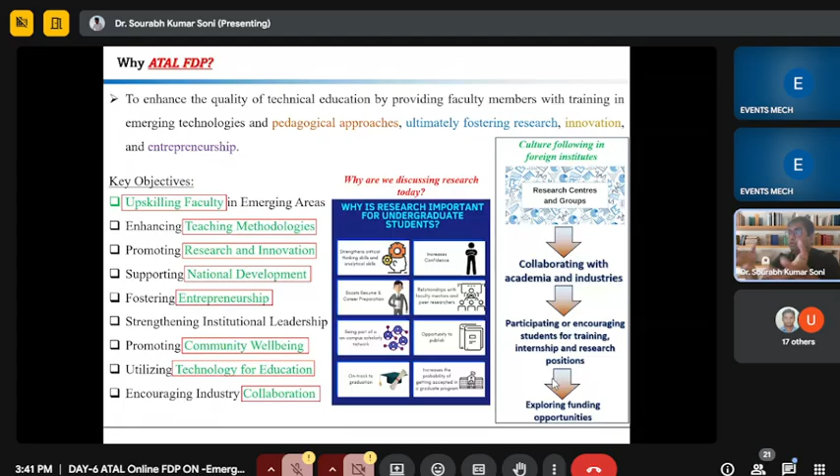For that, I observed that in foreign countries, professors are forming research groups and centers, and in those centers so many BTech students, master students, and PhD students are working. Further, they are collaborating with academia and industry regarding their research work, and professors are also encouraging students for training, internships, and research positions. Further, as a cumulative approach, they are exploring funding opportunities for their research. These are the trends usually going on in foreign countries. So as an Indian postdoctoral associate, I also want to explore this area for our faculty members.

So now comes the topic. Today we are talking about composites, additive manufacturing, high entropy alloy, and material characterization. The first topic is composites.

If anyone asks what is a composite, the first thing that comes to mind is, what is the difference between an alloy and a composite? From this slide you can see this is the alloy - in an alloy, basically atomic level mixing is there. But in composites, if you use two or more distinct phases like metal, ceramic, or polymer, they remain separated at the microscopic scale, but they will do their work together while remaining present in their base material.

So this is the main difference between alloy and composites. And if we want to classify the composites available in the materials arena, there are basically two kinds of composite. First is based on the matrix, and second is based on reinforcing material.

Based on the matrix, the popular ones are metal matrix composites, polymer matrix composite, and ceramic matrix composite. And if we look for application specifically, structural composite and particulate composite are more popular among the other composites. If we hear the word composite in some presentation, what is our perception? It is more useful than conventional material, maybe more lightweight and more strength.

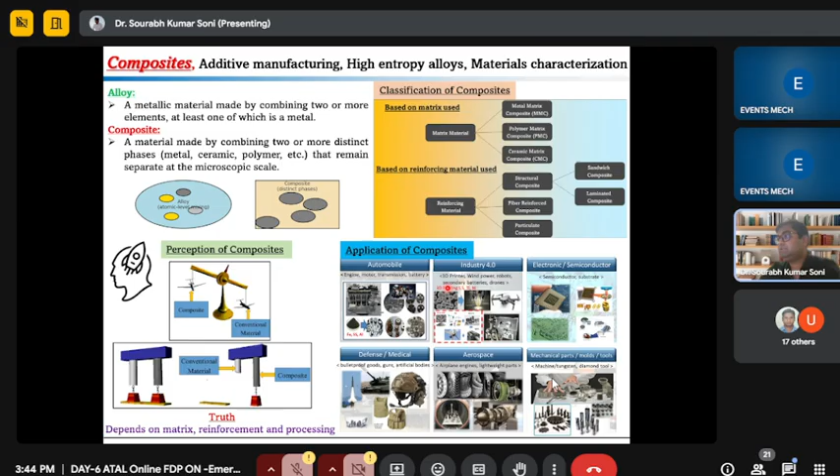So there is a huge demand for composites in the material science industry, and we are using them, and this field is under evolution also. In future 10 or 20 years, definitely composites will replace conventional materials.

So from this slide, I would like to highlight which kind of matrix materials are available in the composite arena. If you follow metals, so aluminum, copper, magnesium, titanium - this kind of matrix material. If you go for polymer, then epoxy is the most popular and widely used. If you go for thermoplastic polymers, then these are some matrix materials available.

If you are looking for fiber, then glass fiber and carbon fiber are in the forefront, followed by aramid and boron fiber which are also very popular. And in research kind of activity, we are following jute fiber, bamboo fiber, and cotton fiber for producing composites.

What about the reinforcement material? Huge variety of reinforcement material. What kind of property you want to increase in the basic matrix material - so based on that, we can use the reinforcement material.

There are two kinds of reinforcement material: micro size and nano size. Micro size means their size is in the range of micro, and nano means nano size. So they are usually categorized, and further categorized into carbon nanomaterial, some ceramic nanomaterial, ceramic carbon nanomaterial. So there is a huge variety.

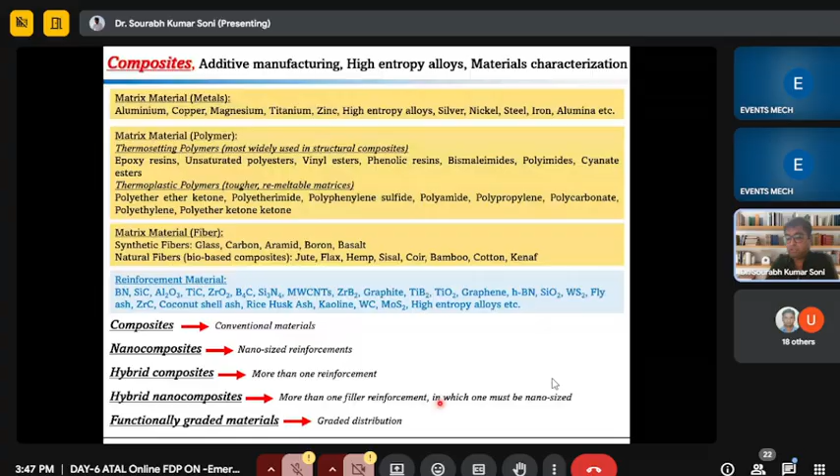So you can read - in previous sessions by our speakers, I observed that they introduced composites, so I skipped that composite part. So now I am talking about metal matrix hybrid composite, composite and nanocomposites.

So as you can see from this diagram, there is a huge number of publications going on since 2010 to 2024.

2025 is going on, so still there are some less. Definitely it will cross 24 in the next 4-5 months. So there's huge publication activity in hybrid composite and nano composites.

For fabrication of this composite, some fabrication processing routes are used, and among them stir casting is widely used. Stir casting is the liquid processing route, and powder metallurgy is the solid processing route. So in liquid processing, stir casting is widely used, and in solid state, powder metallurgy is widely used. Apart from these two techniques, spark plasma sintering, SPS, is also popular to produce specimens, and this comes under the solid processing route. So these three are the major contributors.

Apart from these three, liquid and solid, additive manufacturing is also now trending. In additive manufacturing, I personally observed that DED, especially DED and SLM, are used by researchers to fabricate hybrid nanocomposites.

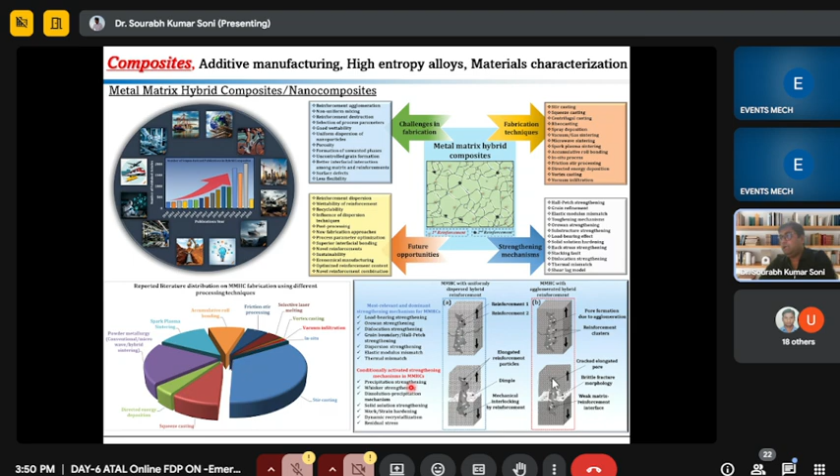Before going to the processing condition, I want to highlight that dispersion of reinforcement is very important, very critically important. So for achieving uniform dispersion, various kinds of dispersion techniques are available in the material science field.

The first one is ultrasonication. In ultrasonication, what we do is pour our reinforcement material into the solvent, then perform ultrasonication, and then dry the powder to get the reinforcement in powder form. This is the ultrasonication apparatus, where we try to break the agglomeration within the solvent material. This is very popular specifically for nanoparticles.

This is mechanical stirring, same as ultrasonication, but instead of using an ultrasonication apparatus, we use mechanical stirring so that we can uniformly mix the two reinforcement particles.

Another technique is ball milling. This is the setup - you can see in ball milling, this is the jar. In this jar, there are some balls, and with the balls we pour our reinforcement or matrix metal, whatever it is. I will clarify this further later. Then we ball mill this powder with the help of these balls, and we get some uniform dispersion, but it has some implications too, which we will discuss later.

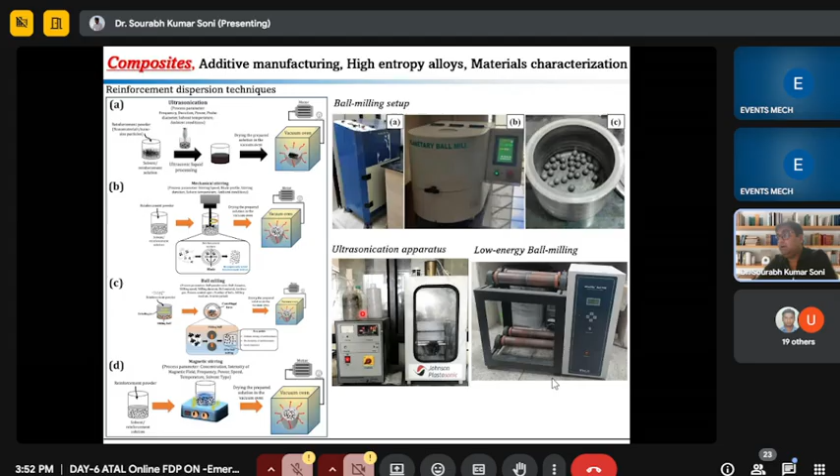If you follow the composites research publications, you will find this easily.

For the fabrication route, earlier I mentioned that the liquid state is very popular, and in liquid state, stir casting is more popular. This is the schematic of stir casting, this is the schematic of squeeze casting, and this is the schematic of ultrasonic assisted stir and squeeze casting.

In stir casting, we cast the molten metal under gravity, without using any secondary forces. But in squeeze casting, we cast the molten metal with the help of a hydraulic ram to achieve a more dense specimen. So this is squeeze casting.

In ultrasonic assisted squeeze casting, we take the help of an ultrasonication transducer to get uniform dispersion of reinforcement particles within the molten metal during casting. So these are the three very familiar casting techniques we use.

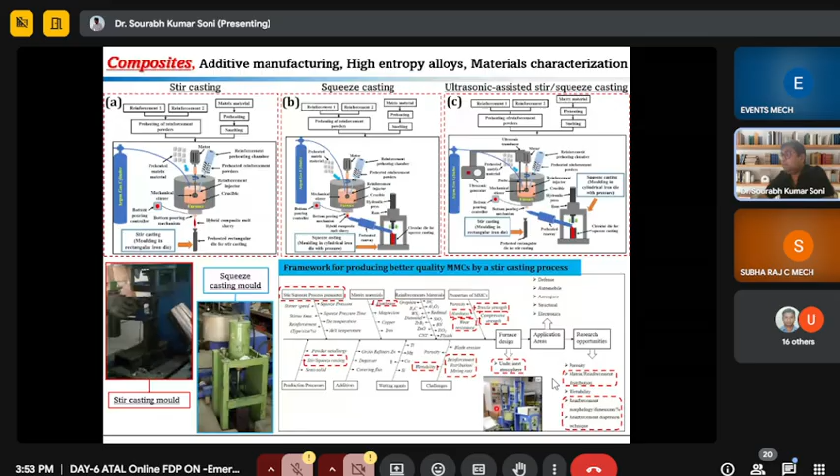This is the stir casting mold which I can use for fabrication, and this is the squeeze casting mold which we have used for fabrication of the specimen. This is the very famous Ishikawa diagram to improve and get better quality in MMCs with stir casting, particularly the stir casting process. So whatever area you want to work in, you can choose for your PhD or whatever you want.

In this slide, I want to highlight the most critical part. In stir casting, what is going on? This is the molten metal. Assume this is molten metal, and these black and white parts are the matrix material and reinforcement material.

So while stirring, what is going on? It will mix properly, but just after the removal of mechanical stirring, it will again sediment. So what is the use of mechanical stirring, if just after we remove the stirring operation it will sediment? So we must remove this difficulty to achieve better quality composites. So basically this is in molten metal.

And what is the phenomena going on in ball milling? As you can see here, this is the jar. In this jar, hybrid reinforcement powder is there and milling balls, obviously. And if we ball mill the powder, initially this is for 1 hour, like 30 minutes to 1 hour. What is going on? See, coating of the reinforcement particle in the matrix material, or 1-2 reinforcement particles in between. It totally depends on what kind of reinforcement material you are using.

After ball milling, some agglomerates are breaking. Further, we can see that some agglomerates are very few in the 2-3 hour or 3-4 hour range. What is going on in 4 to 6 hours? Very few agglomerates, but another phenomenon is coming: flattening. Flattening of the reinforcing particle, or destruction of morphology of the reinforcement or matrix material. So this is the major problem.

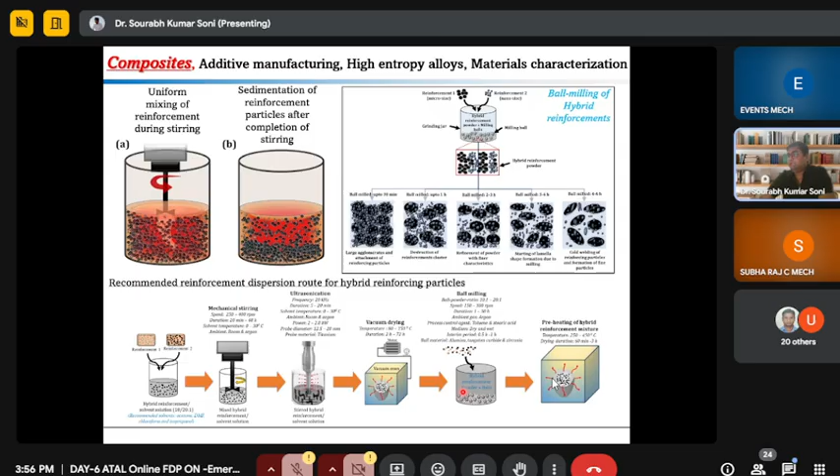And then we have to do the ball milling for a shorter duration to uniformly mix, because one problem is there: if you do the ultrasonication, our powder is usually in wet form, not very dry. So first we need to ball mill, and then we have to again preheat the reinforcement or hybrid reinforcement mixture before adding into the molten metal. So we will get a very good reinforcement mixture.

So based on the literature, I modified the whole stir casting process methodology. First step, we need to follow pre-dispersion of reinforcement. Then we need to do the stir casting process. This is the modern stir casting technique, which needs to be developed for fabricating very high strength composites.

So I already got the patent on this design. In future, I will try to fabricate this machine also. This is the stir casting sample, and this is the squeeze casting sample.

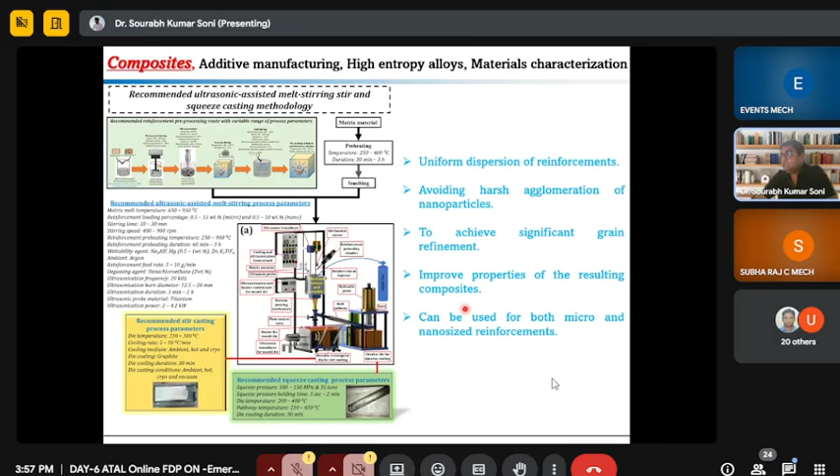So from this setup, we can achieve uniform dispersion of reinforcement. We will avoid the harsh agglomeration of nanoparticles, specifically nanoparticles I am saying that, and achieve significant grain refinement, improved property of the resulting composites, and it can be used for both micro and nano size reinforcement.

Apart from stir casting, this is the conventional powder metallurgy processing. I'm highlighting the word conventional because most of the researchers are using this conventional powder metallurgy.

First step, powder atomization by gas atomization or water atomization. In gas atomization, we will achieve spherical powder. In water atomization, not very spherical, but random kind of particles. So based on your application, like in our lab, people are working on thermoelectric properties, so for thermoelectric properties they are using the water atomizer, but we are doing additive manufacturing. So specifically in additive manufacturing, we need spherical powder, so we are doing gas atomization. So there is a difference.

Further, we will mix the reinforcement and matrix material through ball milling. And after that, there are two kinds of processes. First is compaction followed by sintering. Second, compaction and sintering together. So this is the conventional old fabrication methodology. This one is the modern one, we can say. And among these three, hot isostatic pressing, hot press sintering, and SPS, SPS is the most widely used.

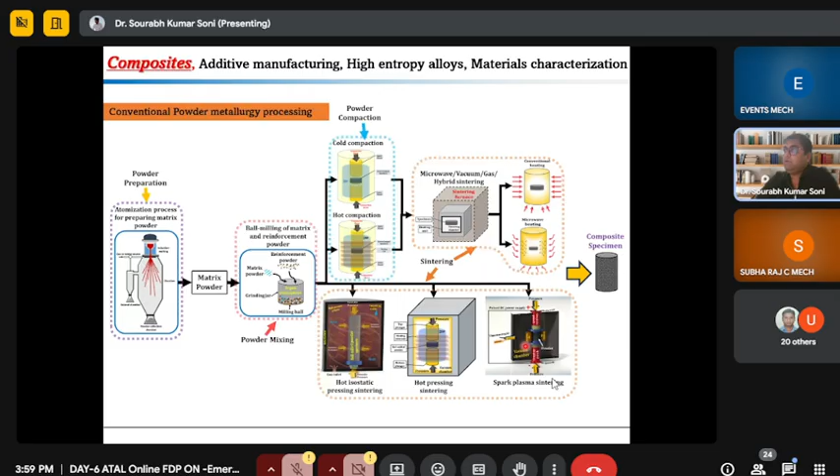In lab, we are using SPS, and we found that this is a very good processing technique. So based on the previous literature, I developed this schematic for modern powder metallurgy processing.

First, processing of powders through gas atomization, then dispersion technique, or pre-dispersion technique, then mixing of matrix material and reinforcement material using this route, and then we can do the compaction and sintering in parallel. This powder metallurgy processing route must be used to develop composites with improved properties, whatever the property - thermoelectric, thermomechanical, or mechanical.

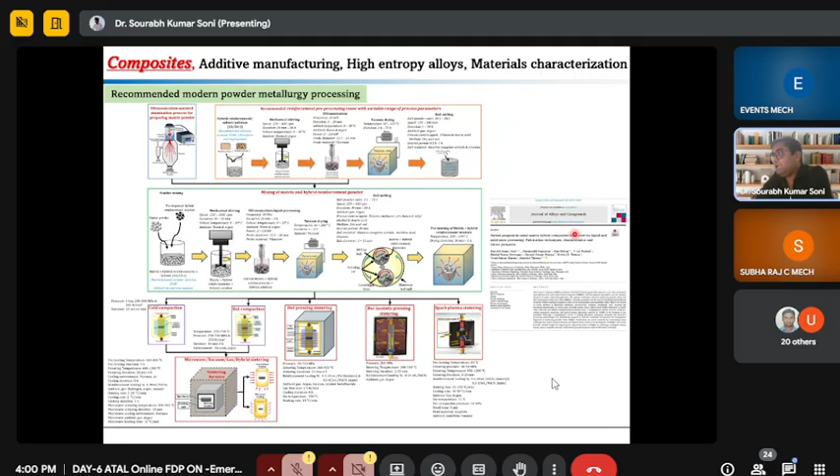I know this figure is not very well visible, so I published this image in my review article, so you can follow that also.

Yesterday, Dr. Ajay Kumar highlighted friction stir processing for fabrication of composites. This is the normal friction stir processing for fabricating composites. Step 1, machining of groove - we produce the groove, then fill this groove with the reinforcement, and then process the groove with the help of the FSP tool. After FSP tool processing, we get the final composite. These are some FSP tools which we are using in FSP.

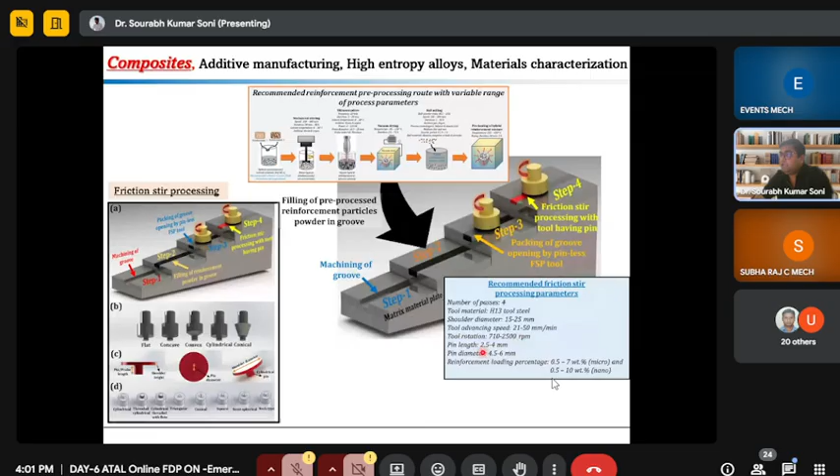After reviewing the literature, I recommended this route for FSP processing, so we can get very good properties in the resulting composites. First, before filling the hybrid reinforcement in the groove, we can pre-disperse the reinforcement, and then we can do the FSP with the recommended FSP process parameters. So we'll get composite with good properties.

Another approach is the ARB process. This is the conventional ARB process which researchers are using now. So I have recommended this novel ARB process so that we can produce composite.

First, the initial matrix material is strip kind of matrix material. Then we will do the annealing treatment for various durations - it's totally dependent on what kind of material we are using. Then we follow anodizing and cutting the matrix strip into two halves and degreasing it to generate the grooves. After generating the grooves, we put the reinforcement material within the two matrix plates, and then after stacking, we will do the rolling.

We'll do the rolling operation either in hot condition or in cold condition - it's totally dependent upon the matrix and reinforcement material. Then we will get a very good ARB processed hybrid composite specimen.

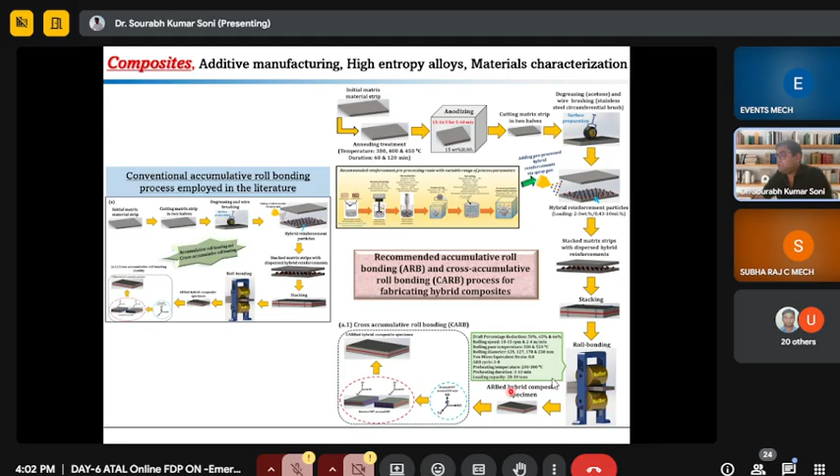Apart from the conventional route, additive manufacturing processing is also nowadays very popular. With the help of additive manufacturing, we'll reduce the weight of the final specimen. So the capacity additive manufacturing has, we can use it for better components which can be used for aircraft or automobile field.

These are some metal additive manufacturing techniques, like direct and indirect. In this, DED and PBF are more widely used among researchers. This is the market trend by AM material - you can see metals are widely used in additive manufacturing, and these are some applications like mobility and aerospace, medical and dental, defense, and energy and resources.

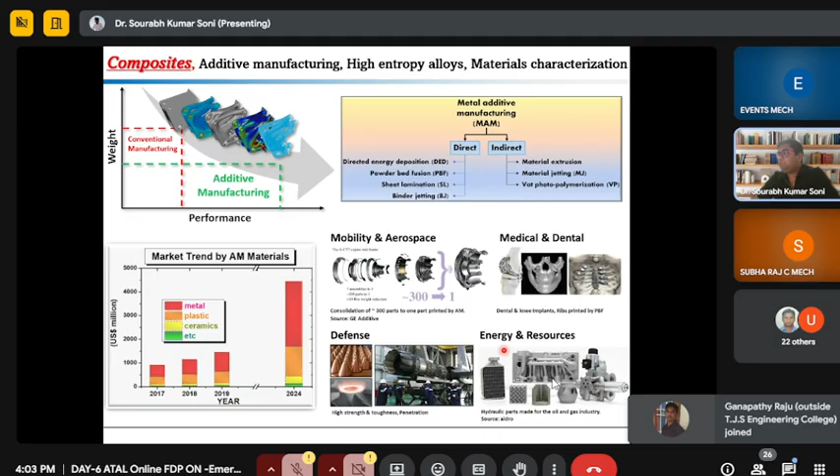In this field, we are using additive manufactured specimens nowadays. So from the literature review, I observed that among other additive manufacturing techniques, DED, SLM, and WAM are the most widely used.

In DED, what we are doing is depositing the powder layer by layer, followed by heating and melting to get the final composite specimen. But in SLM, what is going on? Powder bed is already there. We use the laser source to melt the powder and do layer by layer deposition to form the composite specimen.

So before processing DED and SLM, you can follow reinforcement pre-processing to get uniform dispersion of the reinforcement, specifically for nanoparticles, because carbon nanotube or graphene particles are highly agglomerated. So you must use some ultrasonication or ball milling technique to de-agglomerate them.

This is the WAM process in which we are using either matrix or reinforcement in the form of wires. So before using in WAM, we must produce that composite wire to fabricate the composite.

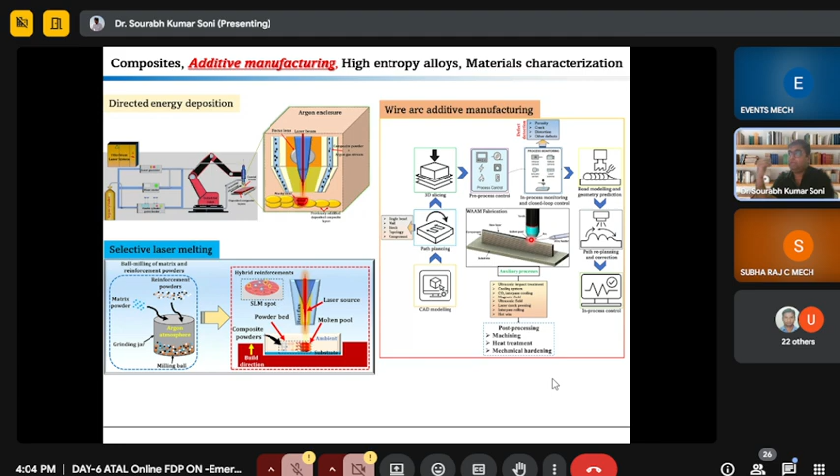As per my knowledge and understanding of the literature, DED is more used to fabricate composites. In my recent review article, I mentioned that there are some SLM prepared composites and some DED processed composites, but the number of composites prepared by DED is more. So here I am focused on DED.

What I have suggested is we can pour the molten metal with the help of an ultrasonication transducer. This ultrasonic transducer will break the nanoparticle agglomerates during the process, and we will get very good composite powder with uniform dispersion of the reinforcement particles, following the gas atomization process.

We can follow the reinforcement pre-processing route, mixing the matrix material and reinforcement particle, and further we do the DED processing. In DED processing, what I recommend is there is one heater behind the substrate material, so we maintain the melting temperature throughout the process.

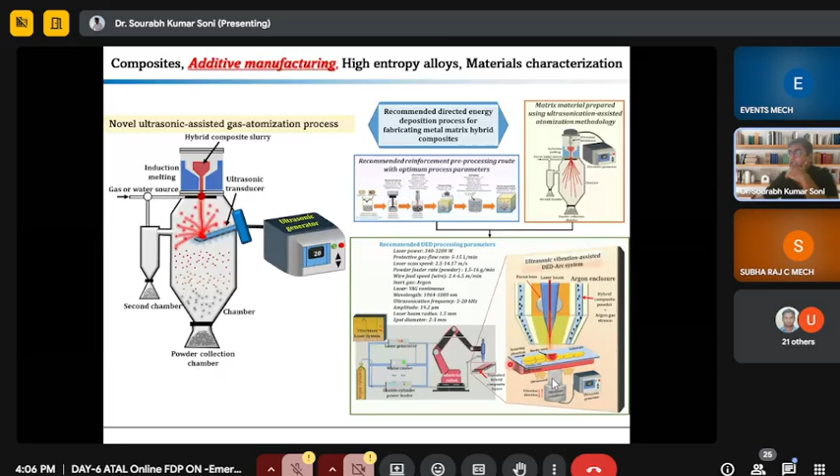It totally depends on the processing condition. I am not suggesting this for every material, but you have to follow the literature for doing this fabrication. While fabrication, we can use the ultrasonication transducer to uniformly disperse the reinforcement material within the powder melt. So this is the schematic of modern processing conditions which we can use to fabricate composites.

Now, high entropy alloy. There are so many reinforcement materials available. We are using high entropy alloy material as a reinforcement and also as a matrix, which you can observe during the literature review. This high entropy alloy can be fabricated by casting and by powder metallurgy. In our lab, we are producing this high entropy alloy using gas atomization, and we are getting very good properties by using gas atomization.

This high entropy alloy is 5 to 35 volume percent of the whole alloy. So this is the difference, and you know what entropy is. Entropy is the disorderliness of molecules, basically we are teaching students like that. So what is the high entropy alloy?

If we have a glass, and in this glass we fill a reinforcement material, it will settle and fill up to the total volume. But if we fill the high entropy alloy, it will not agglomerate, because it has high disorderness of molecules. In that way, high entropy alloys are more popular among reinforcements, and we can use them at high temperature also, so there is an advantage there.

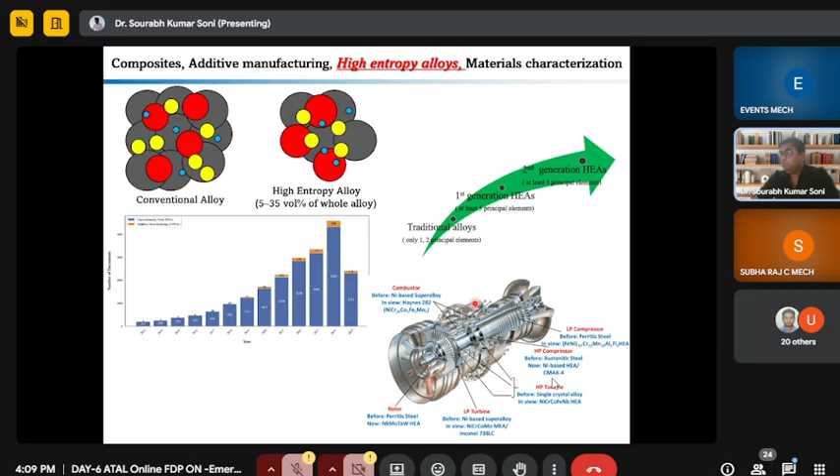Now the fourth topic, and a very critical topic of my FDP, material characterization. It is very important, and I want to highlight that some people are very new to this. Maybe they are attending this FDP apart from some doctorate, and they want to do PhD. If you want to do PhD or explore your expertise in the research field, this characterization is very important.

So after fabrication, we characterize it with the help of mechanical property investigation. In mechanical properties, we investigate tensile property like UTS and yield strength, then hardness, compressive, flexural, elastic modulus, creep, fatigue, elongation, and impact energy. These are the characterizations we estimate for mechanical property.

Further, microstructure analysis, to observe what is available at the microstructure level within the composite or conventional alloy. We can observe this through SEM, TEM, FESEM, AFM, laser scanning microscope, optical microscope, optical profilometry, EDS, and EBSD also.

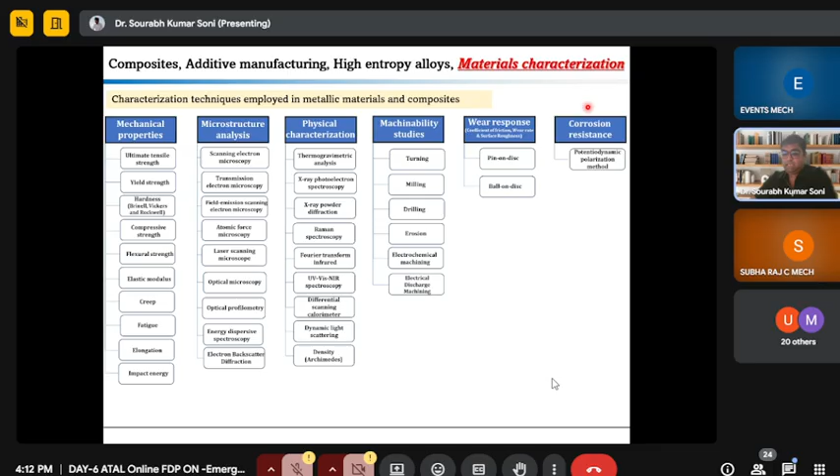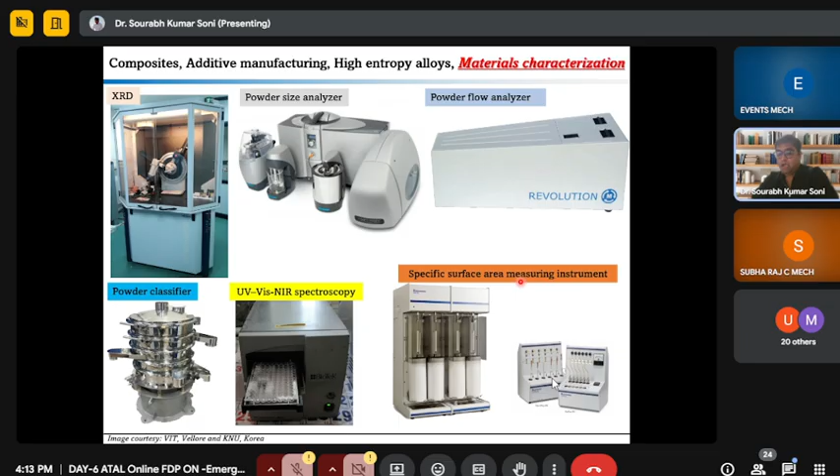Why am I highlighting this? Because I went so many times to analyze my nanoparticles in SEM, but came back with empty hands because I was not able to observe the nanoparticle. So I went through the FESEM, and it was very good. You can use FESEM.

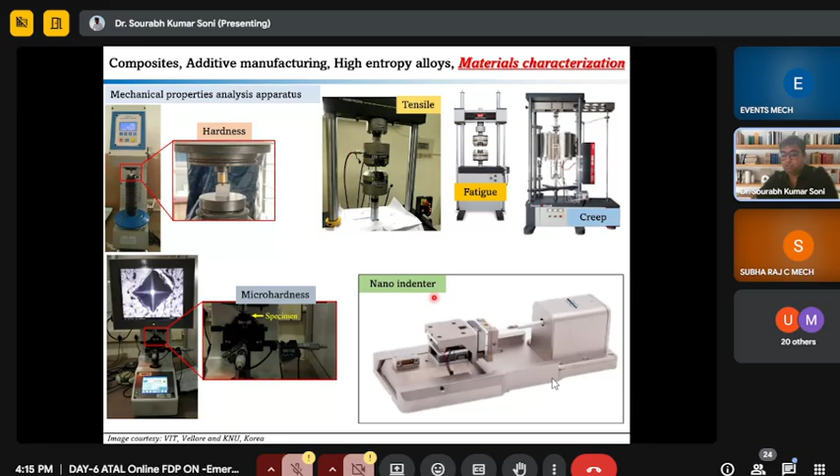This is the fatigue machine, this is the creep machine, and this is the nano indenter. Basically, the nano indenter is installed within the SEM, so while doing SEM, you can do nano indentation also to observe the hardness and elastic modulus.

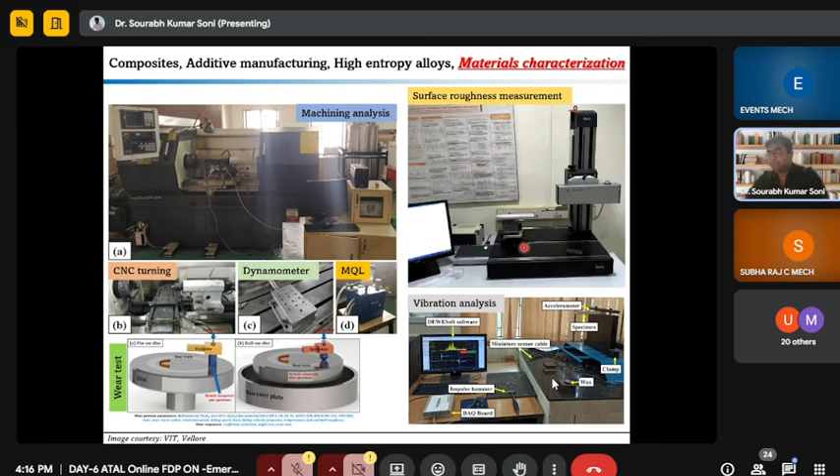Now let's come to my contribution in this field. I want to highlight most of my publications, but due to lab constraints, if a paper is under publication, submission, or review, we can't show that data. But the work I have already published, I'm highlighting through this PPT.

So the first work: we prepared some high entropy alloy powder, an aluminum Cantor alloy, and this is a medium entropy alloy, an Fe-based medium entropy alloy. These two powders I prepared by the gas atomization process. You can see very spherical powders we prepared, and further we performed ball milling operation followed by SPS.

So from the SPS we will fabricate the bulk with varying reinforcement percentage or proportion, whatever you want to play with, to fabricate your specimen. After that we measure the density of the specimen. I am going fast because this PPT has more number of slides.

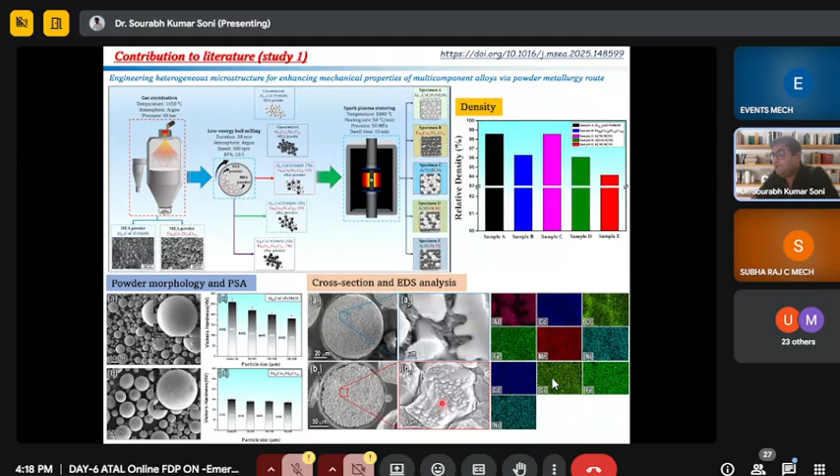This is the density we have measured for the prepared specimen. This is the morphology of the powder, very spherical morphology. This is the cross-sectional and EDS analysis of the prepared powder. This is the cross-sectional image analysis of the HEA, and this is the cross-sectional analysis of MEA. We can clearly observe the dendritic structure and their composition, meaning what is going on within the dendritic structure.

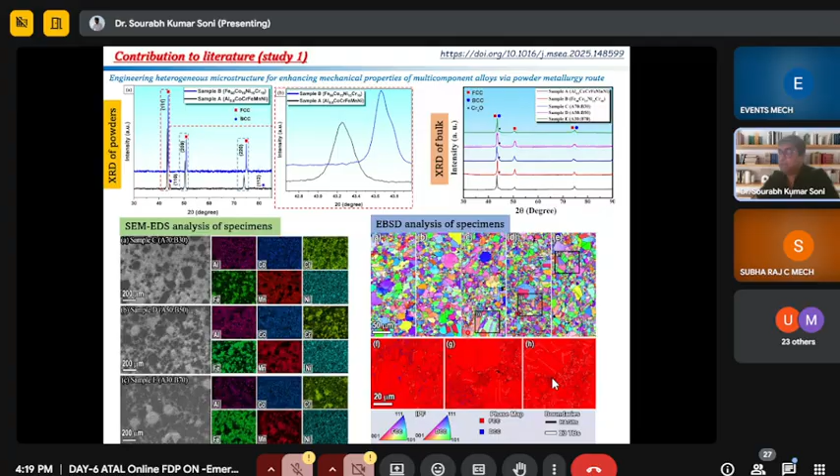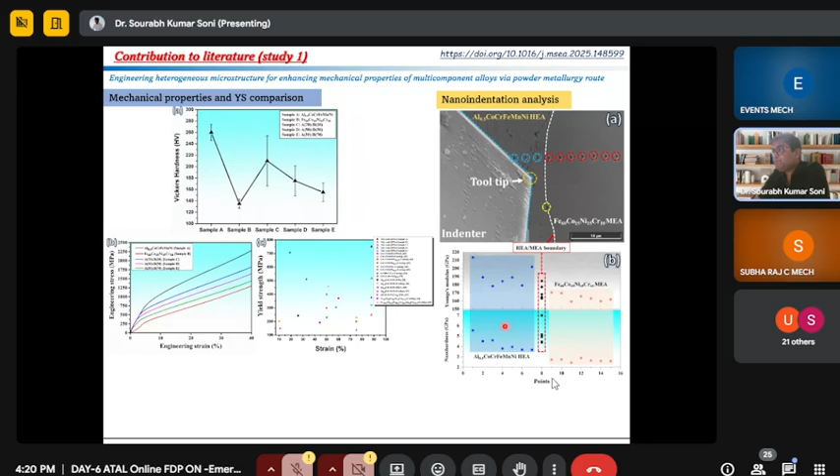This is the nano indentation analysis. This is the HEA specimen, this is the HEA surface, this is the MEA surface, and this is what we can call the interface. I have analyzed the nano indentation at the HEA phase, MEA phase, and interface also, so that we can relate what is the trend of hardness. Here, aluminum HEA, Cantor HEA is showing more hardness than Fe MEA. So you can relate this kind of property.

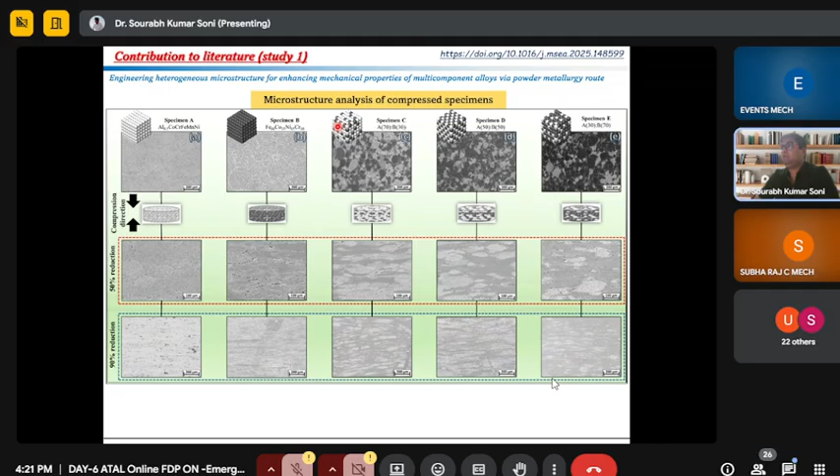This is the schematic showing the microstructure, deformed microstructure after 50% reduction, 90% reduction. You can show this kind of schematic—it is very good for the final schematic.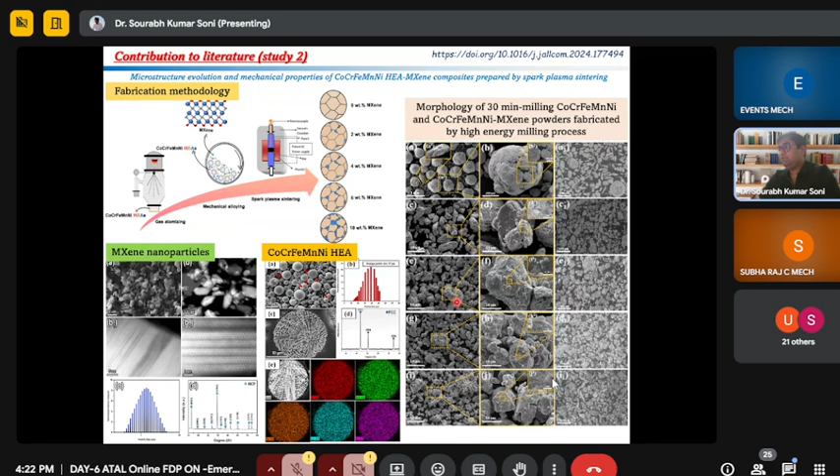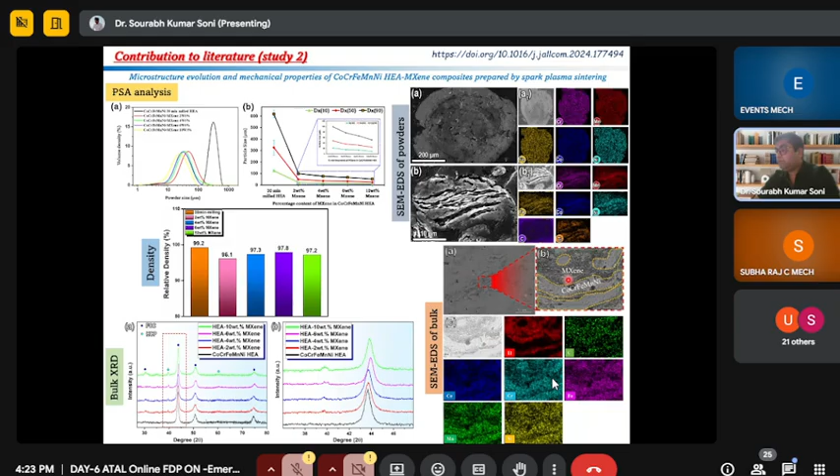Then density measurement, how much densification we have achieved during the SPS. Then this is the XRD, how much other phases are present in our specimen. Then cross-sectional SEM-EDS of the powder to achieve the dendritic structure or powder morphology destruction. Then SEM-EDS of the bulk to observe the distribution of MXene reinforcement or other reinforcement within the composite specimen.

So as per my suggestion, if you are working, you have to focus on the ductility as well as UTS both, by using some novel reinforcement, novel pre-processing, or some secondary processing routes.

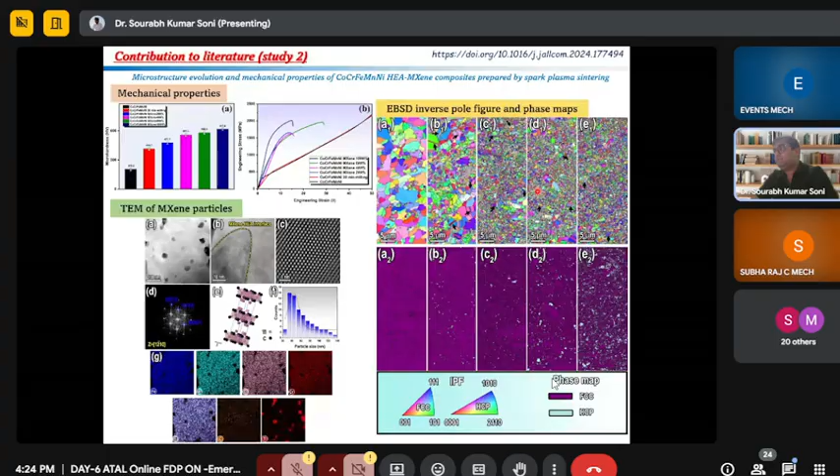So this is the EBSD of the prepared composite. You can easily observe the grain refinement. So the reviewer will be happy. Yes, there is a grain refinement. So, Hall-Petch theory or some different strengthening mechanism is involved in your processing or within the composites.

This is the TEM. We must highlight the dislocation pileup or reinforcement particle present in our specimen, and some nano deformation twin or stacking fault within the specimen, so that we can relate what is the reason behind the increment and decrement within the properties of the composites. So this kind of analysis we have to do for high impact factor publication.

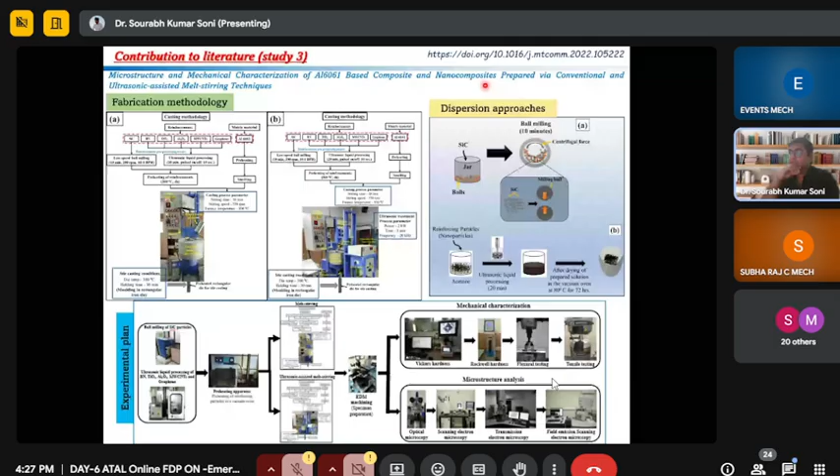I have used ultrasonic assisted stir casting and squeeze casting apparatus to produce the aluminum 6061 based composite and nanocomposite. Since my starting, I am very curious about the effect of various reinforcements. That's why I did this work. I have used SiC, boron nitride, TiO2, Al2O3, MWCNT, and graphene nanoparticles to prepare the composite. And I want to highlight which composite is the best for researchers.

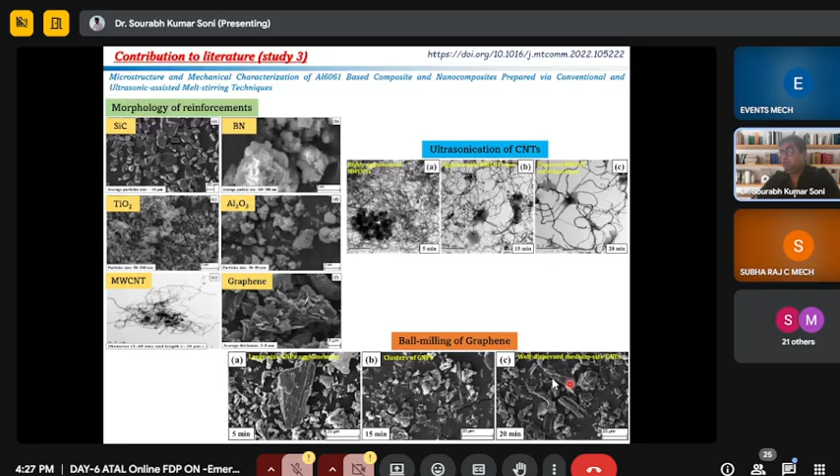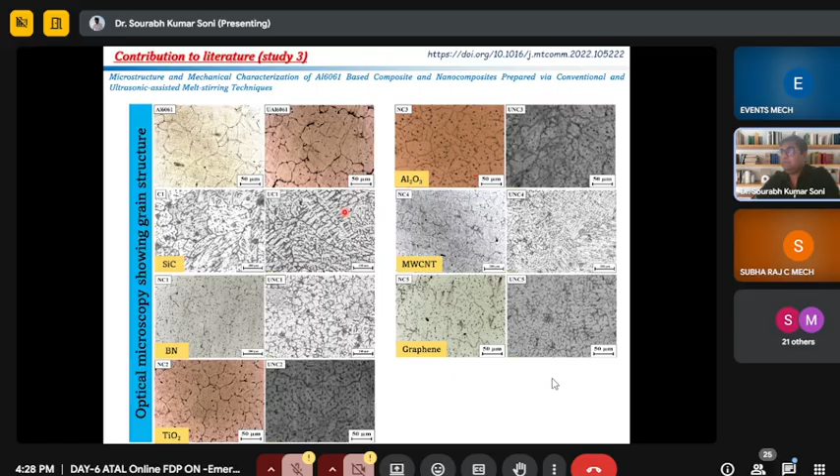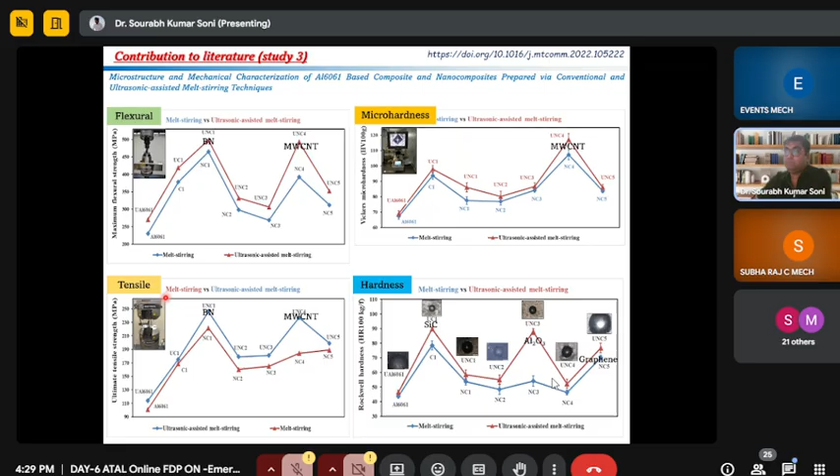Reviewers always ask this. We can relate that SiC, Al2O3, and graphene are ceramic particles responsible for improvement of hardness, while this MWCNT tubular structure is responsible for improving the mechanical property. BN nanoparticles are very promising to improve the mechanical strength of the resulting composite. So you can relate your nanoparticle with the resulting properties.

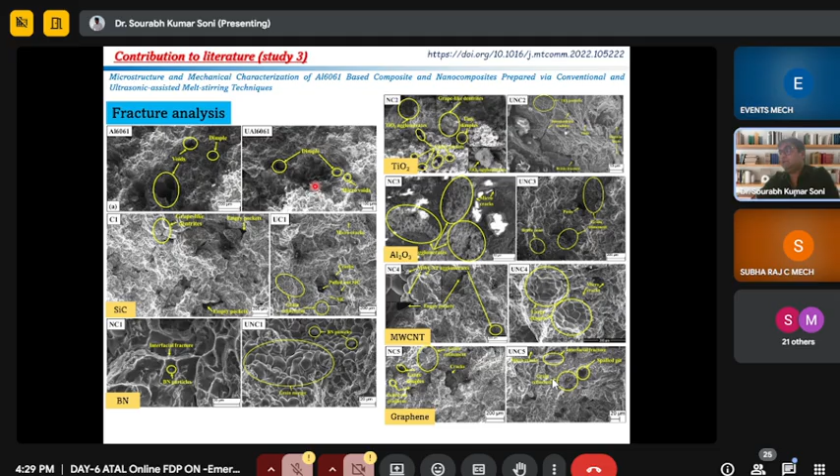So these are the fractures. We must analyze the fracture surface of the specimen - what kind of fracture, where is the agglomeration, where are the empty pockets, where are the pores, where is the brittle fracture or ductile fracture - we can easily observe.

Another research I have performed is the dispersion of MWCNT for different durations, then stability analysis. For stability analysis, I have done the dispersion for 5 minutes, 15, 30, 45, and 60 minutes, and observed with photographic images. I have even performed it after 30 days also, to see what is going on after that time. So you can do this kind of investigation also.

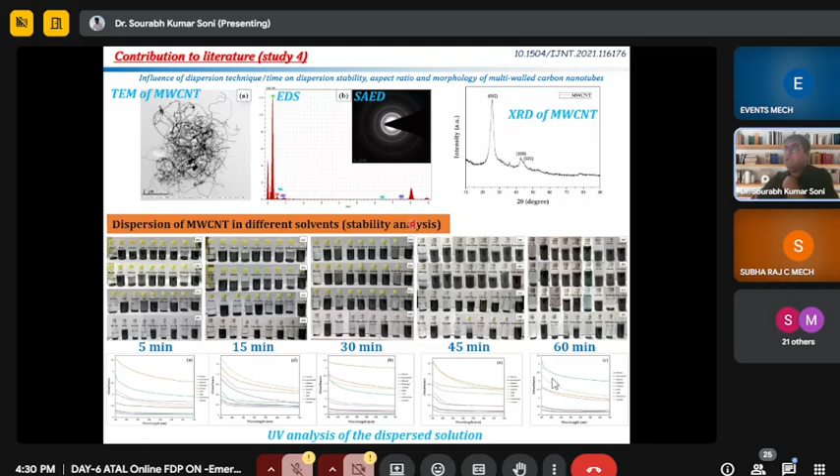And why this TEM and EDS and XRD? Because sometimes the reviewer will ask, you purchased the material or you produced the material - so does it belong to the produced material or not? If you claim that this is the MWCNT, you must produce proof. So you have to attach the TEM or EDS or XRD to prove that whatever you produced or purchased belongs to that material.

So this is the SEM. That time I told you what is the difference between SEM, FESEM, and TEM. This is the SEM image of MWCNT. I observe nothing. I want to observe the agglomeration or dispersion of carbon nanotube, but here I am not able to observe any very good data.

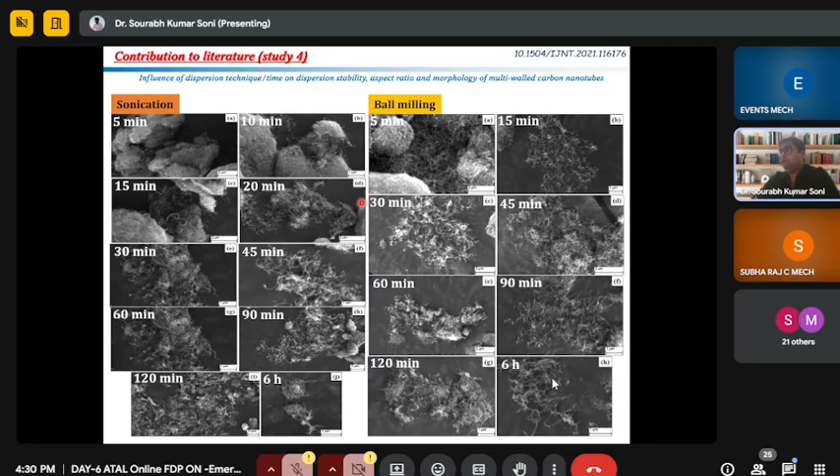So I went for TEM. In this TEM image, you can observe very clear microscopic images, and we can see this is the 5 minute, this is the 6 hour. So very shortening, MWCNT shortening is there through sonication. Here through ball milling, very nanotube shortening occurs. So there is a difference between sonication and ball milling also, and you can clearly observe through the TEM because it is a high magnification microscopic image.

And further, if you want to do HR TEM also, you can check is there any destruction in the morphology structure. So you can analyze this kind of microscopic image through nanoparticles also. So if you are analyzing nanoparticles, my suggestion is go for the TEM.

Another research - in this I have performed different fabrication routes to fabricate the composite. So this is route 1. I have done the sonication for MWCNT and TiO2 separately. But in route 2, what I have done is mix MWCNT and TiO2 into one solvent, and then performed stirring and sonication to uniformly mix the MWCNT and TiO2 reinforcement particles.

Further, I have observed the FESEM image. This one is the FESEM image. In the previous image, like this one, we can't observe anything, but here FESEM is very clear. So this is the SEM and this is the FESEM. Here we can observe the coating of TiO2 particles over the MWCNT. Not very clear, but okay, we can say something from that image.

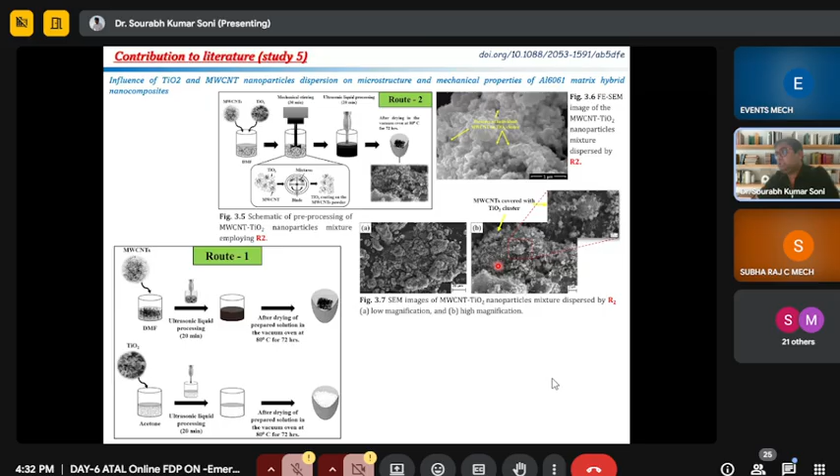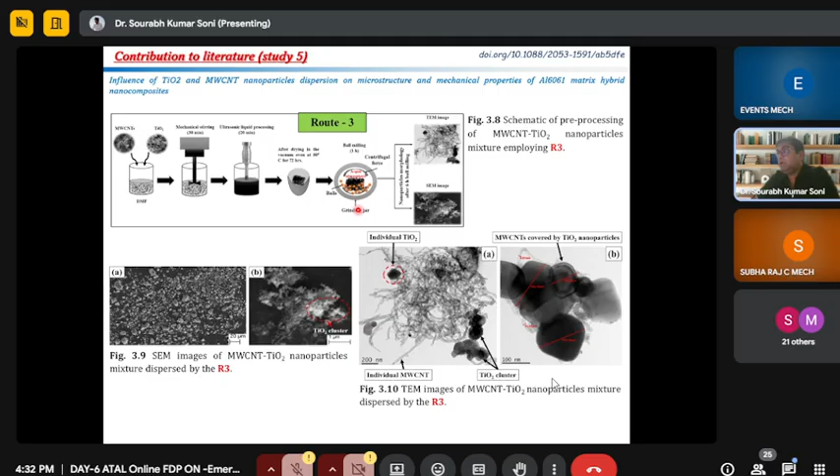In another route I followed, route 3, first mixing, then stirring, then ultrasonication, then ball milling. So this is the microscopic image of the powders obtained from route 3. Here we can observe very individual TiO2 particles for 6 hours. This is R3 - sorry, 1 hour ball milling, and this is just for 6 hours. Very few TiO2 particles are available over the nanotube.

So there is a difference between the ball milling durations also. As per your literature review or research goal, you can do the dispersion process. This is route 4, which I already explained. And you must have measured the average particle size also after ball milling, so you can relate what is going on behind the ball milling apparatus.

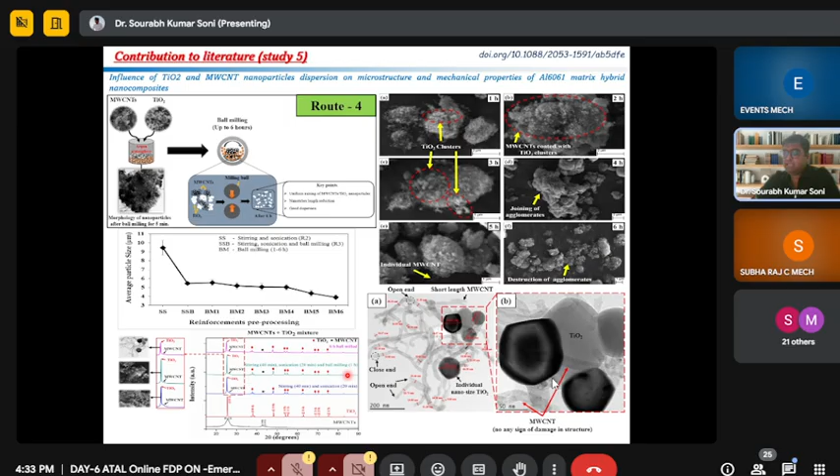And then you have to observe the XRD, whether any other phases are available. In my case there are no other phases. This is the EDS of the MWCNT TiO2 nanoparticle mixture. So we can see the different SAED index. We can claim that there is some kind of deformation, deflection because of ball milling.

This one is the MWCNT and TiO2 interface. This is the MWCNT particle, and this one is the TiO2. So we can say that there is some dislocation or deformation within the particles.

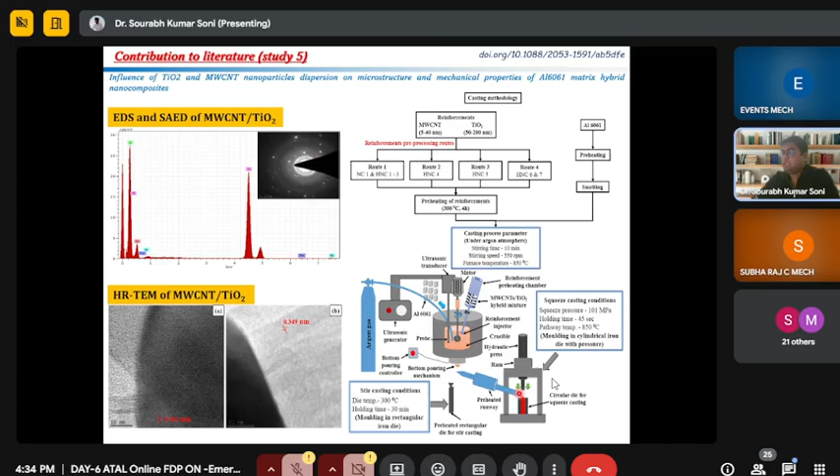This casting methodology I have used - based upon your reinforcement, you can use the casting methodology. In this methodology, what I have done is 4 routes, and then casting methodology with the ultrasonic assisted stir casting and squeeze casting. So I prepared both specimens.

So this is the same EDS of the specimen. We can observe the dispersion of reinforcement particle within the specimen, and we can relate further what is the agglomeration, how much is the agglomeration, and in which sample we are observing good uniform dispersion.

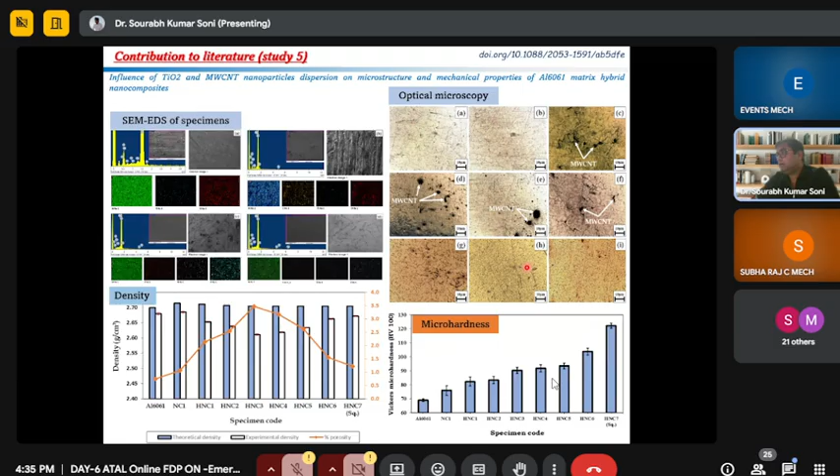From this optical microscopy image we can observe grain refinement also. Here in the squeeze casting sample I have observed very less agglomeration and porosity. So I can say that squeeze casting is a very good approach to fabricate the MWCNT TiO2 aluminum 6061 metal matrix composite. And in this specimen, I am getting higher micro hardness also.

So we can relate this structure-property relationship. This one is the tensile stress strain curve of different specimens. As I highlighted earlier, this is aluminum 6061 - see here we can see higher ductility, but this composite specimen has less ductility. Yes, UTS is increasing, no problem, but why is ductility decreasing? We must focus on that, so we can go for high impact factor journals.

Okay, so this is the FESEM images.

I'm not watching the time, so if time is about to finish, just let me notify.

So this one is the fracture analysis. Here we can see the TiO2 cluster, MWCNT.

Sir, tell me sir. Yes sir. Do you ask anything, sir? I'm not watching time, if time is about to finish let me know. Still you have time, sir.

Yeah okay. So from this FESEM image, we can observe the MWCNT ropes also. That's why I said FESEM is more popular, more useful than the SEM image. So if you are going for nanoparticles, go for FESEM. Here is the TiO2 cluster, MWCNT cluster, which are responsible for the ductility decrement.

So we can relate this. Here also, in another route, I have observed this kind of pores filled with MWCNT TiO2 clusters. So I can say that this processing route is not good - here there is an agglomeration kind of observation.

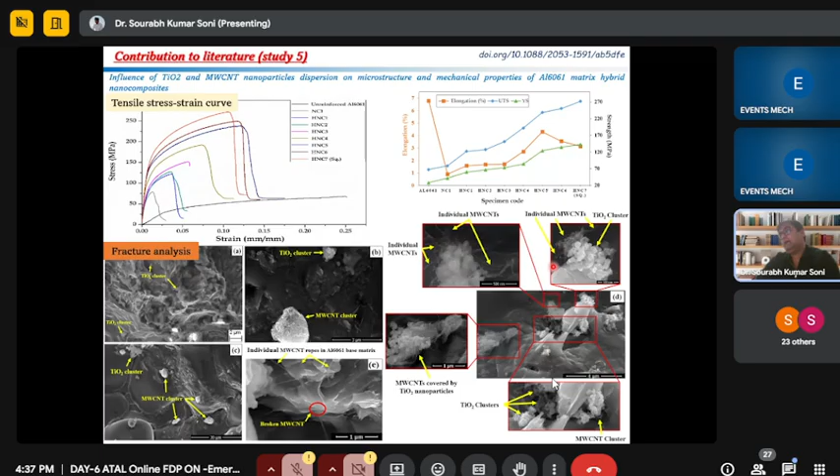So this is another study I have performed - the machining investigation of the prepared composite. First I prepared a stir casted specimen, and then later I prepared a squeeze casting specimen to observe the machining analysis. This is the stir casting ultrasonic assisted mechanical stirring and squeeze casting apparatus. We can produce stir casted specimens and squeeze casted specimens. This is my processing methodology, and this is my fabrication methodology.

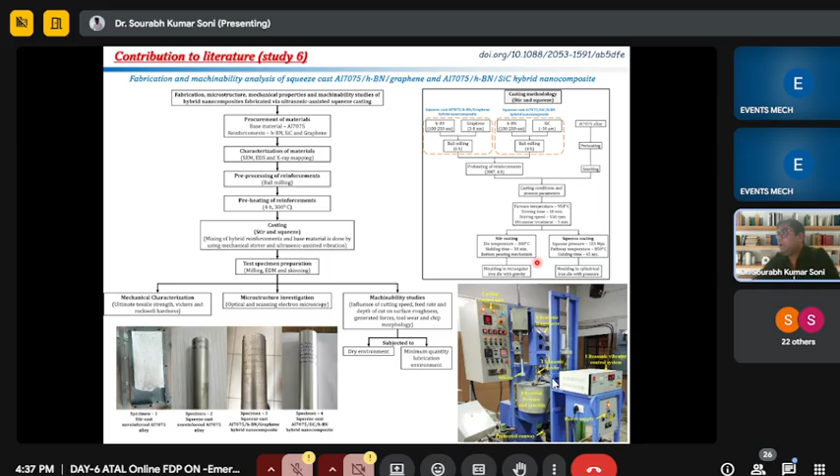From this same image, I have analyzed the ball milled reinforcement particle mixture to observe what is going on after the ball milling. These are high magnification images of the same. Here we can see the HBN particles are uniformly coated over the graphene nanoparticles, so we can show this kind of morphology change after the dispersion technique.

Here we can see that after prolonged 6-hour ball milling duration, nanoparticles are highly stuck to the graphene particles, and the graphene particle is also flattened due to intensified ball milling.

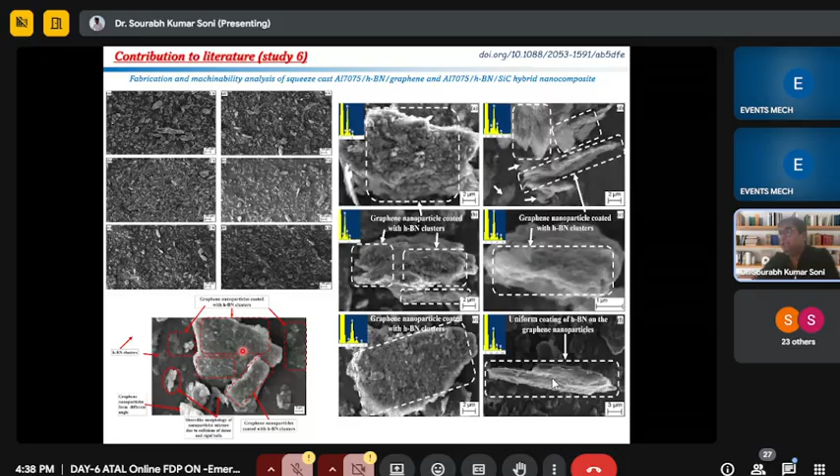Here I observe the strength of aluminium 7075 and the hybrid composite specimen. I observed that graphene HBN hybrid nanocomposite has more mechanical property compared to others, but in SiC composite, SiC HBN, I have observed more hardness because SiC particle is a ceramic particle, and ceramic particles are mostly used to improve hardness and wear property. So we can cite the literature also, and we can claim our result also.

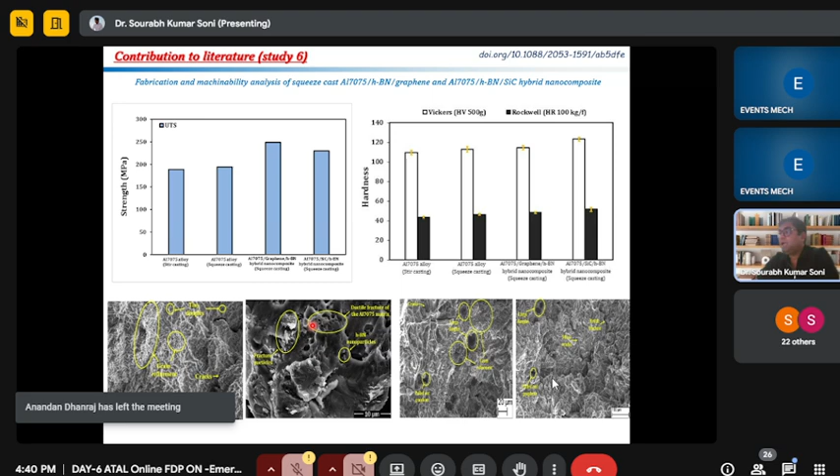Further, I have analyzed the machinability analysis. So what is going on behind the machining investigation? I have done the machining under dry condition and MQL condition. Machining under dry condition means the tool is directly involved with the specimen. But if we machine under MQL condition, meaning minimum quantity lubrication, very fine droplets of lubrication impinge between the tool and the machined surface.

For preparing this MQL, we have used HBN nanoparticles also, so that we can improve the efficiency of the working fluid. So here we can see if we increase the feed rate, surface roughness is increasing.

But if we are machining this aluminium 7075 specimen versus this hybrid composite specimen, we observe less surface roughness in the hybrid composite. Why? Because the HBN particle or graphene particle are self-lubricating nanoparticles.

If I use SiC, it will increase the hardness, but it will complicate the machining operation. But if we use graphene or HBN particle, it will increase the mechanical property, increase the hardness, and improve the machining characteristics. So based upon this kind of literature review, we can use different reinforcements for varying the property.

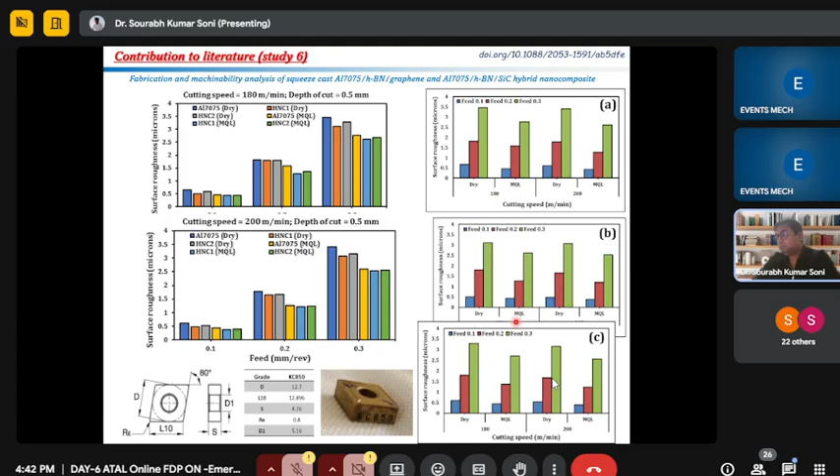This is a chip morphology specimen analysis after machining. This one is for aluminium 7075. This one is for aluminium 7075 graphene HBN hybrid nanocomposite, and this one is SiC HBN, under dry condition and under MQL condition.

So what is the difference between them? Here, very long entangled chips. Here, not very long but entangled. If you relate here, very short length chips. Here, very short length and spring kind of morphology.

From here we can observe what kind of phenomena is going on during machining. From this image, we can analyze that the self-lubricating hybrid nanocomposite, because of adding HBN and graphene, shows low surface roughness compared to the conventional composite. So we can use this composite in components that will be subjected to machining operations.

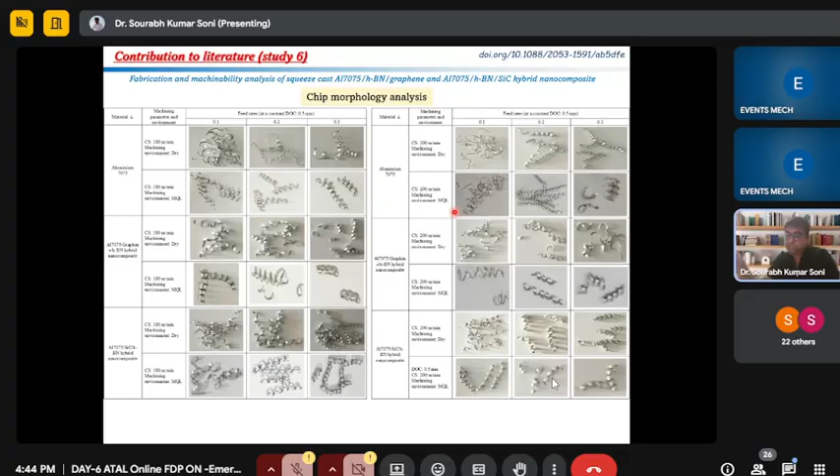Because composite preparation is one thing, application is another thing. For application, we must surface finish our specimen. So for surface finishing, either we can use milling or turning, and within turning or milling, how our specimen behaves, we must analyze.

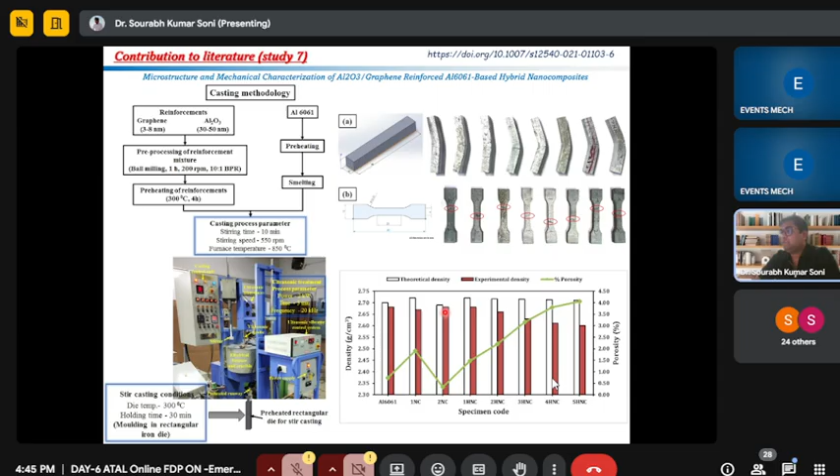I have observed that the graphene and Al2O3 hybrid composite specimen has very high grain refinement, which has implications on the mechanical property also. This same image shows the flexural strength, why it has very low flexural strength and why it has very high flexural strength. We can relate this with the property-structure relationship.

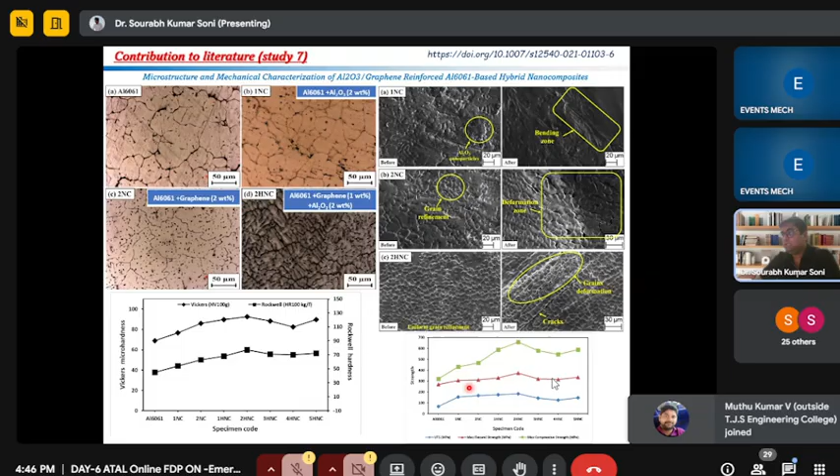So this kind of variation is also there as per the various reinforcement particles. This is the strength graph, and 2 HNC shows the highest strength among the other compositions.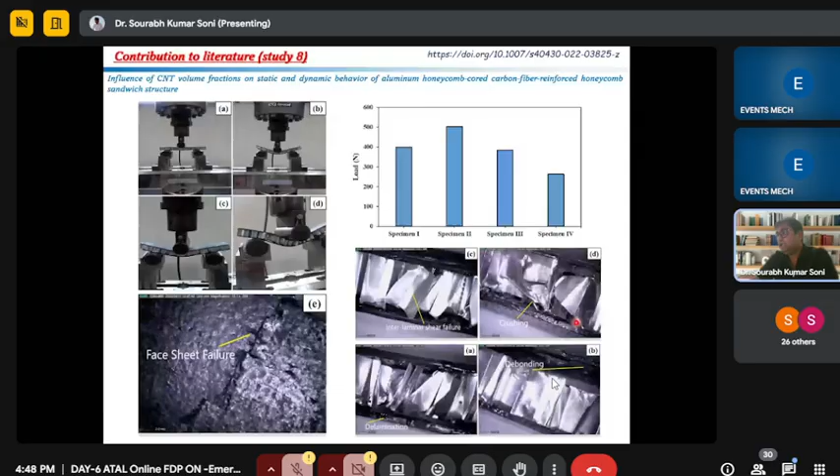This is a failure of the honeycomb structure. Different specimens show different failure mechanisms, which we can also analyze.

I have performed diverse investigations, so I cannot conclude all studies in a single PPT, but every study has a different conclusion you can analyze in my publication. But generally I can say that nano reinforcements are most promising, but we have to uniformly disperse that nanoparticle within the composite specimen. That is a major challenge we need to overcome.

As compared to conventional reinforcement, high entropy alloys are popular, but we have to look for proper composition and proper processing conditions so that we can balance strength and ductility.

Additive manufacturing technique is among the most promising techniques, but one article I read said additive manufacturing has failed to deliver. I don't agree, because additive manufacturing has only grown in the last 10-15 years. Every new technology takes time to deliver real-time applications or products, so it is taking more time. In future you may see printing of whole rocket components or 3D printing of whole structures through additive manufacturing. So we must focus on the particular processing conditions or materials. It has some potential, but we need to spend more time, obviously more 10-15 years.

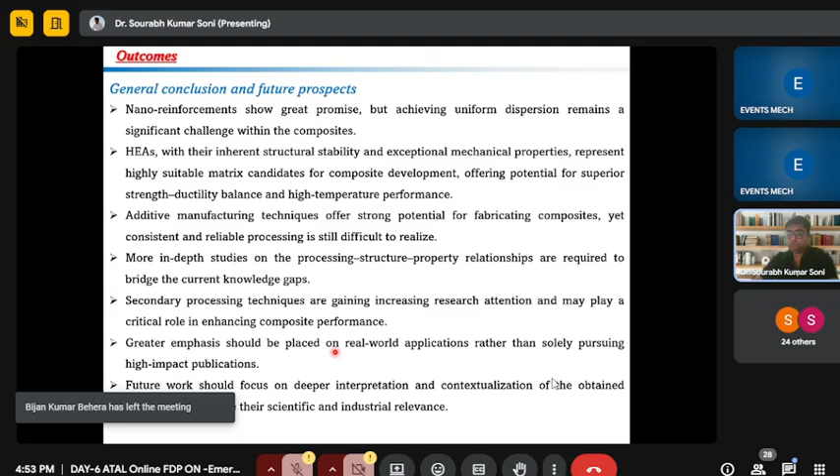After this, I would like to thank the participants and organizers for giving me this opportunity. I started from the very beginning because at one time I was also new, and I wanted this kind of information from FDP, so I put it from the very basics. I would like to end my presentation here.